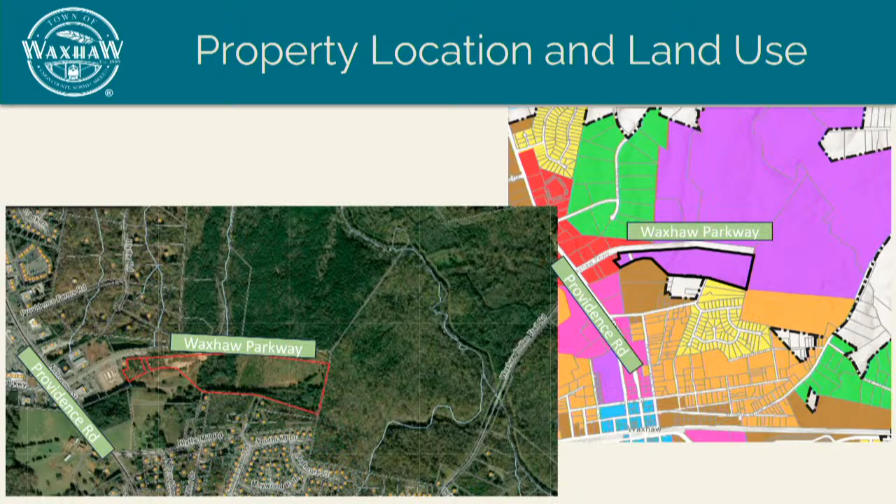The applicant is requesting conditional zoning, which is a site-specific development plan with the ability to place conditions on the plan. The proposed development contains up to 312 multifamily units. Ground floor multifamily is allowed in employment center with conditional zoning approval. The maximum number of dwelling units per the supplemental standards is 24 units per acre.

In addition, the applicant is proposing 54,000 square feet of office retail. The employment center zoning is heavy on industrial and warehousing types of uses, so the applicant is requesting CC commercial corridor uses and NC neighborhood center permitted uses as well.

Setback for employment center includes a 40-foot front setback. They were able to get that 40 feet along the multifamily section. However, they're asking for a 20-foot setback due to the shape of the lot on the west side. The site plan development standards and related graphics make up the proposed zoning district, and only minor alterations may be made in accordance with the LDC.

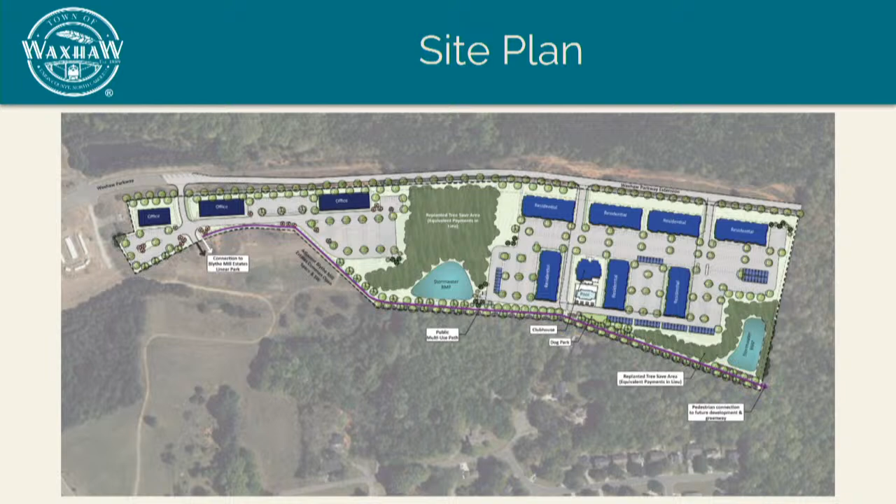Waxhaw's traffic consultant, Kimley Horn, has prepared a traffic impact analysis, or TIA, to determine required transportation improvements within the study area. Based on the analysis performed, the applicant is required to construct half the length of Waxhaw Parkway, from Providence Road to Waxhaw Indian Trail Road. They would have to provide a new signal at Waxhaw Parkway and Providence Road, and then a payment in lieu for a portion of the NC 16 at 75 intersection improvements.

If approved, they would be required to meet the design standards of Chapter 6 of the LDC. This is what they have proposed for now for elevations.

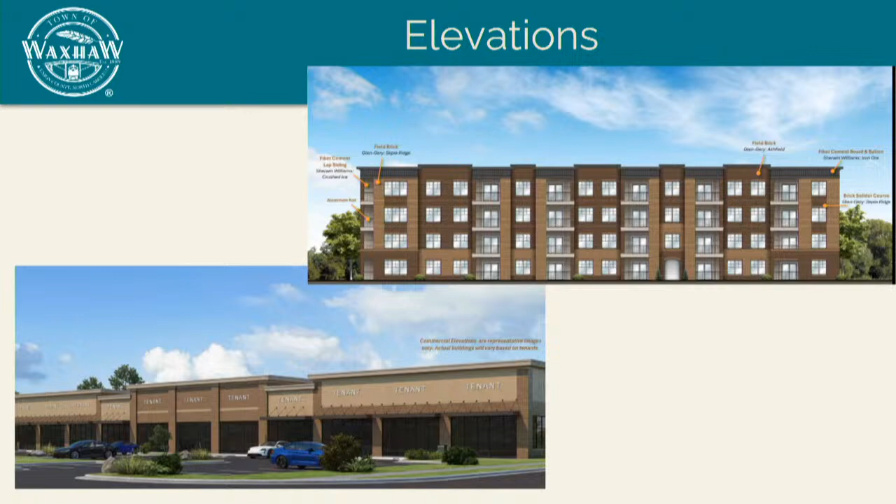The applicant has submitted conditions or development standards for this specific site. Their conditions or development standards are listed, and staff has added additional comments or conditions to their standards in bold. I'll just go over a few of these. Number 1, we already talked about.

EC zoning is heavy on industrial warehousing type of uses. They're asking for NC retail office uses and CC commercial corridor type of uses. Staff is adding that no residential permitted use by right.

Actually it's conditionally zoned, shall be allowed within the commercial retail portion of the plan. Number 2, we're just saying that it shall meet all landscape requirements of the LDC, not just for parking lots. Number 4, trees will be preserved or planted in accordance with the tree preservation requirement.

There's a section in the middle and the southeast side of the plan that may be just brush type of vegetation. We're just reserving the right to go out there with the Union County arborist to make a determination if that should be preserved and mitigated per our fee in lieu.

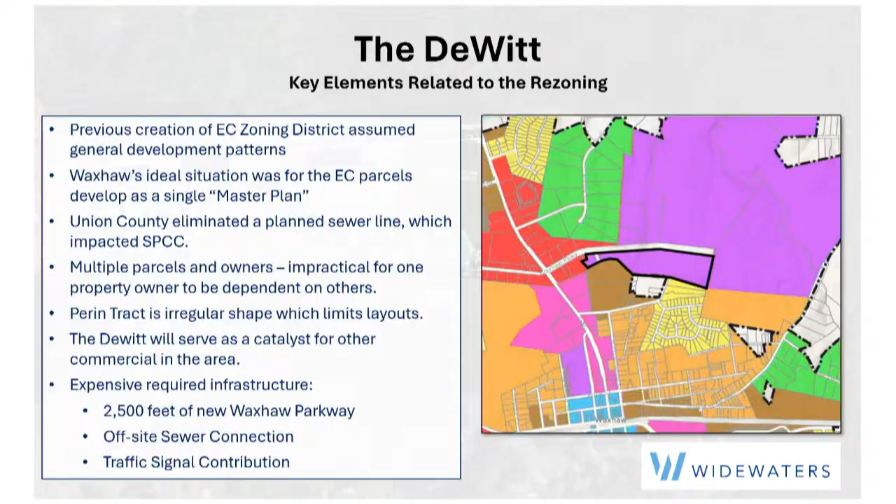So I want to just real briefly and quickly go through a few of the ways this property is going to help continue to be a catalyst for some of the other elements. If you see this property at the top, shaded orange, that will be the new section of the Waxhaw Parkway, and then there will be a connection point to the south.

We're going to talk about one of the other connection points that staff has been discussing with us. You can see that purple area is the Blythe Mill townhomes, which is probably under construction or about to be. The CDs have already been approved and so forth. So that will be part of that connection to the north-south, right there.

So there will be, through that and through this tract, a connection from the parkway all the way down, parallel to Providence Road and NC-16 and Broome Street. What this also does - you can see some of the dash lines are future parkway sections, how that will eventually come around, how Southcliff would connect in eventually. We thought it was important for you to see holistically how this would all be impacted.

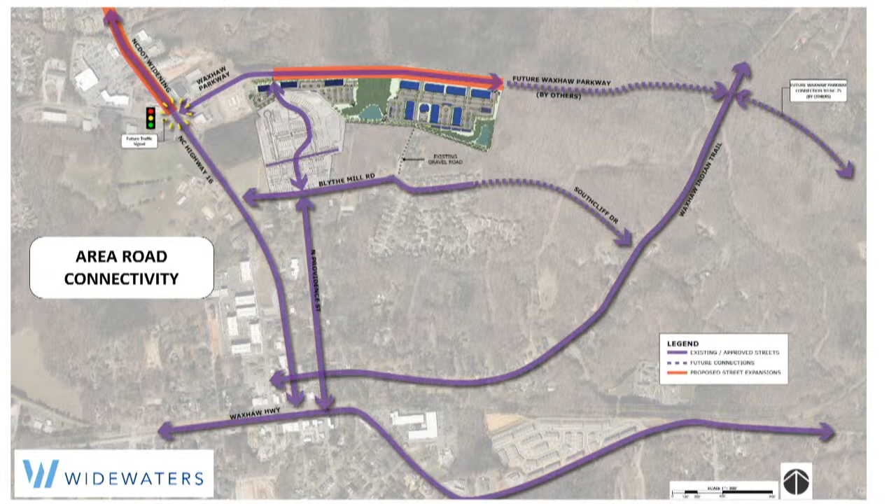Just to talk about the parkway for a second - it's been on the town's transportation plan for 20 plus years probably, and very little of it's been built. So this would get another half mile of a section built, and if each project can continue to build a portion of it, then the town doesn't have to build it, and you don't have to wait for NCDOT, which would probably be decades down the road.

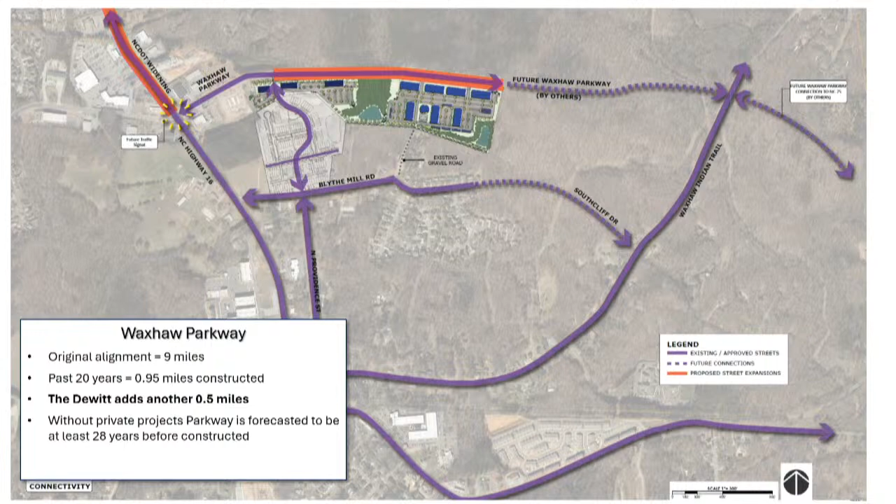Pedestrian corridors, real quick - I wanted to walk through that as well, because as Mr. Chairman you mentioned that connection point and being able to connect people, pedestrians, throughout the entire town. The yellow is an existing, or will be an existing, trail and sidewalk system that will connect the parkway down to the existing sidewalk on Blythe Mill Road, and then that will be able to connect over to basically the Providence Road, Broome Street section right there.

What the applicant is suggesting is a multi-use path on the south side - that dashed green line would run basically the border of the property - and then on the north side you'd have a sidewalk fronting the property, which would go along Waxhaw Parkway. As other developments come along, the darker green would continue connecting going east, and that thicker dash line would be the eventual greenway planned by the town. So no one project can do it all at once, but this is one more step closer, one more step in the process of connecting a lot of different things, not just by road.

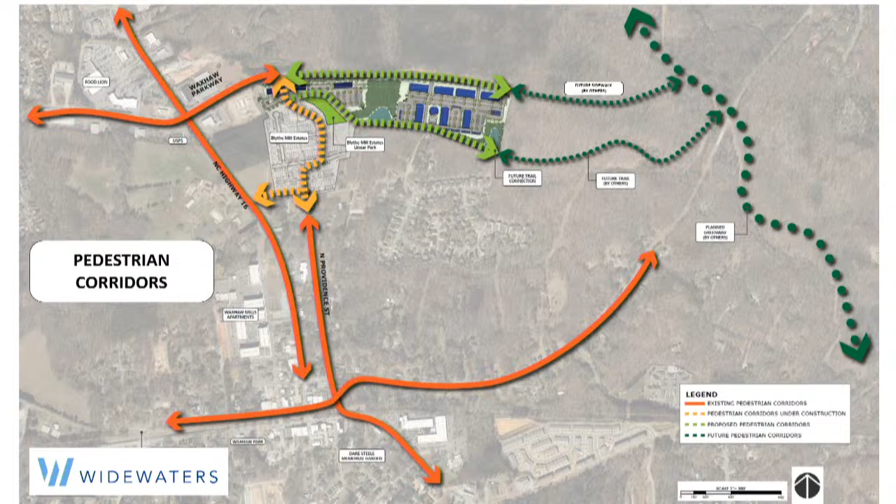Wanted to bring up the one condition that staff had added that the applicant is not willing to accept: this connection point to the south. There is already that connection on the western side that goes north-south.

I'll give you a couple of reasons why the applicant's not willing to do that connection. For one, the neighbors don't want it. At the neighborhood meeting, the neighbors that live in that section specifically came and said we don't want a road connection extending Blythe Mill Road up through your property. They didn't want that cut-through traffic. There are only 3 houses there now, and it looks like on GIS or on a survey, it looks like a real road, but it's not.

It's a paper road. Kind of where that arrow is from the schematic there is that there's a cul-de-sac. Past that cul-de-sac, it's a gravel road that connects 3 driveways, and with the trees in there and the existing situation, it would dramatically change those residents and what we're doing there. So that's a big reason why not to connect it.

There's also some grade issues that will impact the south side of this property. The third reason is we fully understand connectivity and why it's important, and we understand why staff wants it. The difference between this and a typical residential subdivision is we're not connecting a road in the residential section - these are basically apartments, so you'd be dumping a road into a parking lot. There's no real easy way to get through. You could get through, but it's not an easy kind of road like you'd have with public streets on a residential subdivision that need to connect their fronting lots.

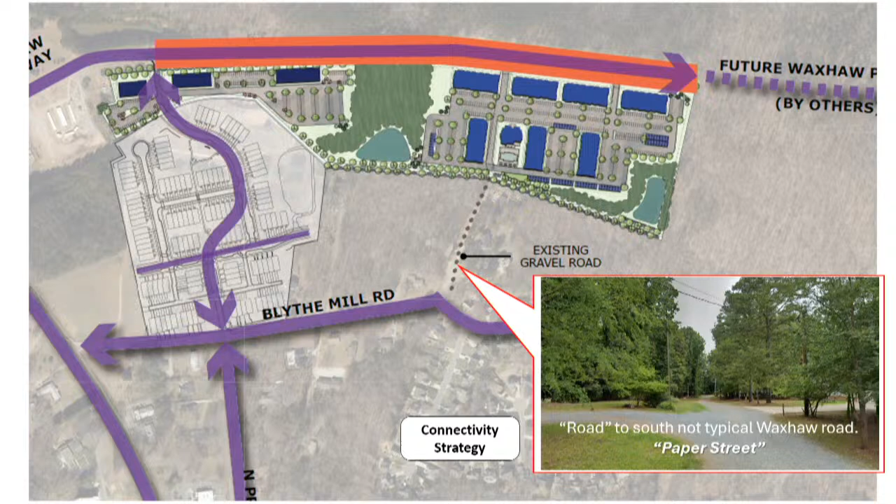This is a different scenario. The applicant's concerned about traffic cutting through an apartment complex - it's just not ideal in a lot of ways, and again, the neighbors don't want it. So that's why I thought it was important to show that, and why that is not something that has been easily agreed to.

Do you have anything to add? I've talked too much. Any questions for us?

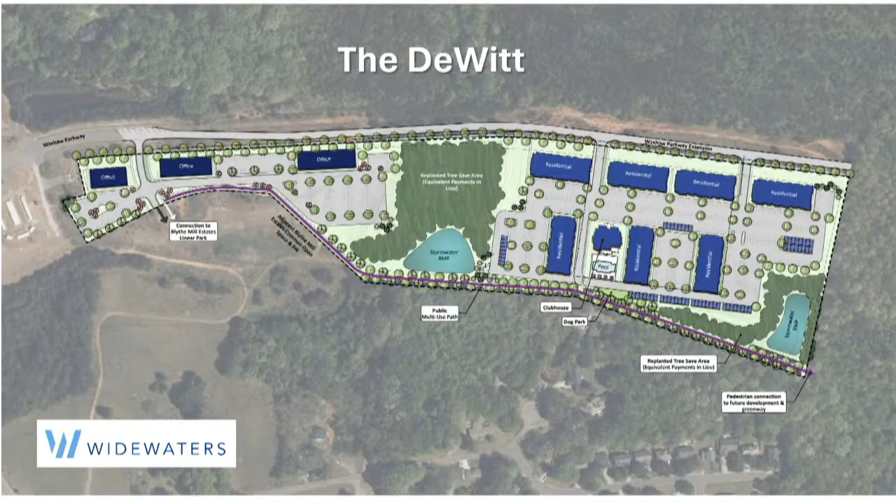I'm also more worried about just balancing it out. That is a large aspect of total call-out on your estimated residential square footage build-out compared to the commercial aspect, and then having the commercial aspect contingent - that part doesn't connect for me. So for me, just that alone, I can't support that.

I will say that the project doesn't work without the residential, because you just won't have the revenues. You've got a large buy-right that is contingent. Would you like the residential contingent versus the commercial contingent? I'm sure if you were going to pick one, you don't want your residential contingent. Why would the town want its commercial contingent?

I'd like to go ahead and still open it up to anybody else if they have any questions.

Can I make one more point? You mentioned that in the employment center, commercial users are to come first. I think the ordinance is actually written kind of vague, and I think they did it intentionally. I think the goal at the time was to not have EC be all residential, and to make sure plans include both uses, otherwise you'd just get a bunch of residential only. That's why this has both on both sides. The developer's not proposing to have residential on the entire site.

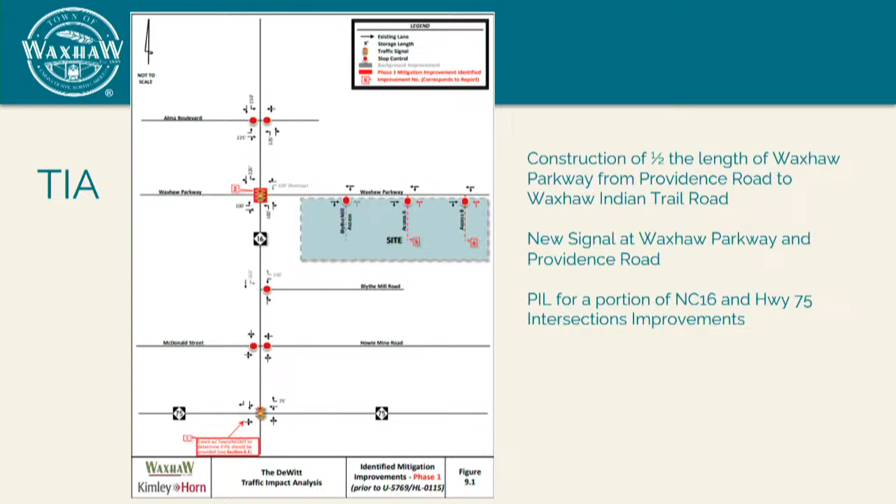Where does that land come from? That can be a request from the town or NCDOT. You'd have to bring it in from the setback, take that area and carve out a paved right turn lane. It's a 110-foot right-of-way, so there's plenty of room for turn lanes if you condition the plan on having them now. So the road would start more to the center of where a 4-lane would be, and you move closer, still preserving the necessary setbacks from the property. Is that what you're saying?

They could put the turn lanes within the existing right-of-way. In a hypothetical world, you would lay out the 4-lane and then add a right turn lane, overlaying the site to make room for that. Understanding it's a narrow site, it may not be able to do that, but that's something that can certainly be looked at. If our true goal is to have it as an artery, built out as 4 lanes in the future, having that additional right-hand turn lane as an additional stacking lane to make those right-hand turns makes sense. Thank you.

From the off-site standpoint, the 2 main intersections will be 16 and 75, which we know is a problem, and then Waxhaw Parkway and NC16. Start with 16 and 75.

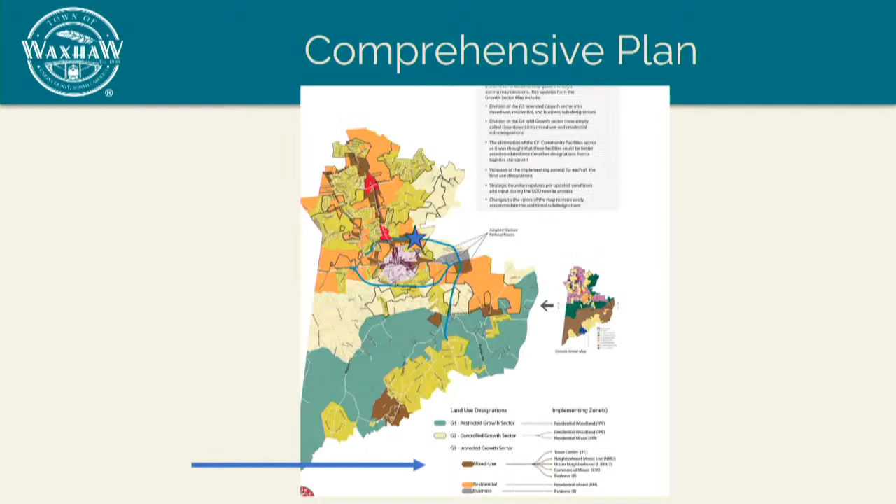I appreciate that. Okay, so we have some conditions from staff that I believe needed to be listed out. And then I guess it would also be in addition to the condition for the proposed right of way, the unknown right of way access, and the current structure of our ordinance for the EC corridor, where commercial was intended to be a center point of the development of the conditional uses.

Where are you trying to go with this? Well, I'm just trying to see if I need to add the additional right of way information into the conditions. You would, or you'd have staff review the right of way before we move to the next step, to review if there's sufficient right of way for decel lanes for the proposed project. Okay, yeah, perfect. So to add, there would be an amendment with John's recommendation for the decel lanes, ensuring we have enough right of way access for those off of Waxhaw Parkway.

Would that be impacted if we made an unfavorable recommendation? List all this? Yeah, Charlie, if they're going to vote unfavorable, do they have to go through all these, or just list a few reasons and note it? Okay, we'll note staff recommendations and conditions, and then we'll make our recommendations.

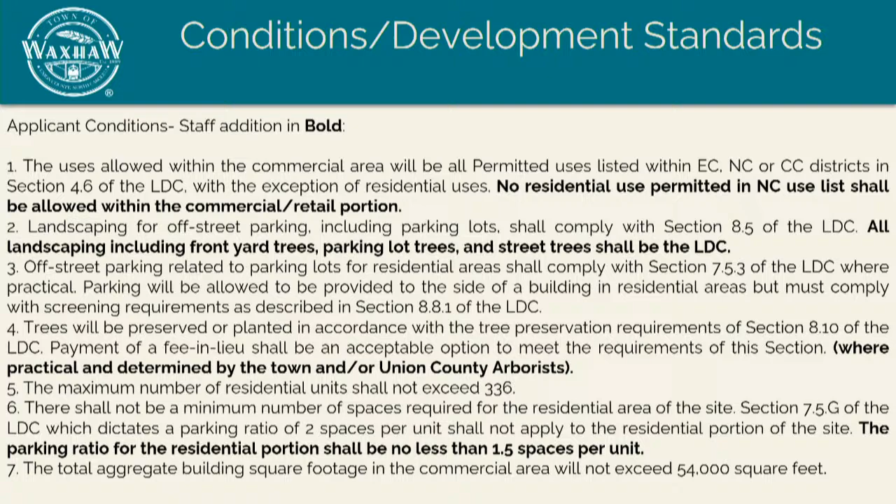Okay, then can we jump back to a motion here for an unfavorable recommendation for CD 004-2024 to the Board of Commissioners.

Just a curiosity, instead of being unfavorable, the question you raised about the contingency—if we took a condition and that contingency's gone, I guess I didn't understand exactly what's unfavorable about it. For me, I was going to amend the 1.5 spaces to 1.6, since that sounds reasonable. And the question is your contingency on the commercial side. I'm just trying to understand what's unfavorable about it, since we could fix that by changing the conditions.

So personally, similar to what Daniel mentioned earlier, I don't think it's consistent with the plan. An employment center may have residential, or could have residential, which is almost like an option. I feel like we're inverse here, in that we have residential that happens to have some commercial associated with it. I'm just reading: employment center zoning allows for development of larger scale businesses to provide employment and economic opportunities. 54,000 square feet is not larger. No.

I'd like to make a motion for an unfavorable recommendation to the Board of Commissioners.

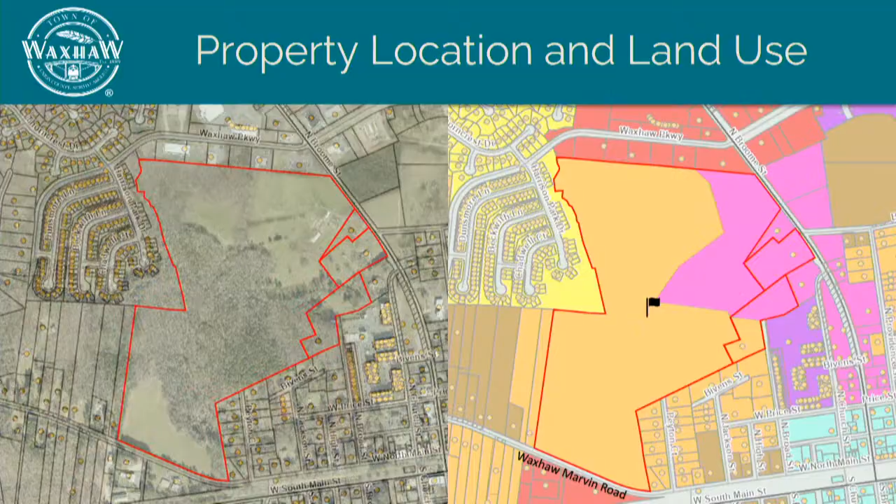This proposed zoning will allow for multifamily, townhomes, single-family, and commercial uses as part of the mixed-use development plan. The site plan, development standards, and the attached vision book and graphics make up this proposed zoning district. Only minor alterations may be made in accordance with our Land Development Code, Chapter 3.

The proposed density for the R4 portion, from this connector south, and the multifamily and commercial is TC. The proposed density for the R4 portion is about 4.27 units per acre, with overall density for the site coming in at 6.79 units per acre. R4 zoning allows for 4 units per acre with a clustering provision allowing up to 5. The single-family and townhome setbacks all meet the minimum lot width and depth using this cluster provision.

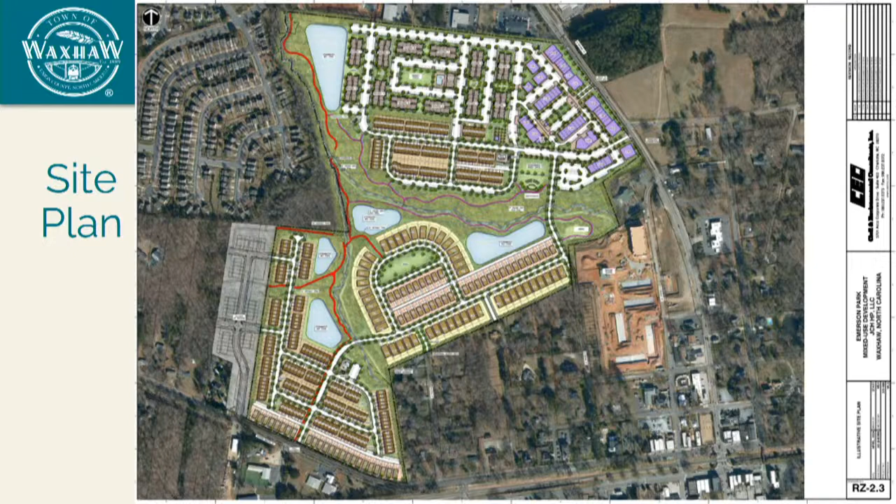Our traffic consultant, Kimley Horn, with Brady Finkley, is here, and they have provided a transportation impact analysis to determine the required transportation improvements within this study area. Data was collected to ensure the traffic created from this project will be sufficiently mitigated, and based on the analysis, they are required to mitigate up to 19 intersections identified in the attached report. Brady will give a presentation on those mitigations more specifically after my presentation.

The Land Development Code requires squares, parks, and other forms of common open space intended to shape the design and character of a project. The applicant is required to provide 15.71 acres of open space, and they currently show 26.14 acres, which meets the 20% open space requirement for the R4 cluster, and then the 2% open space requirement for the town center portion.

Accessible recreation spaces may take the form of trails, parks, plazas, playgrounds, and community gardens. The applicant is building 0.6 miles of Sunny's Way, the primary spine here, as part of the town's 2023 pedestrian plan. This will be a future 10-foot greenway dedicated to the town for maintenance as part of our public trail network. They're also connecting two villages to the Waxhaw trail system via a 10-foot paved greenway, and doing 5-foot crush and run trails throughout the site, which will be maintained by the HOA.

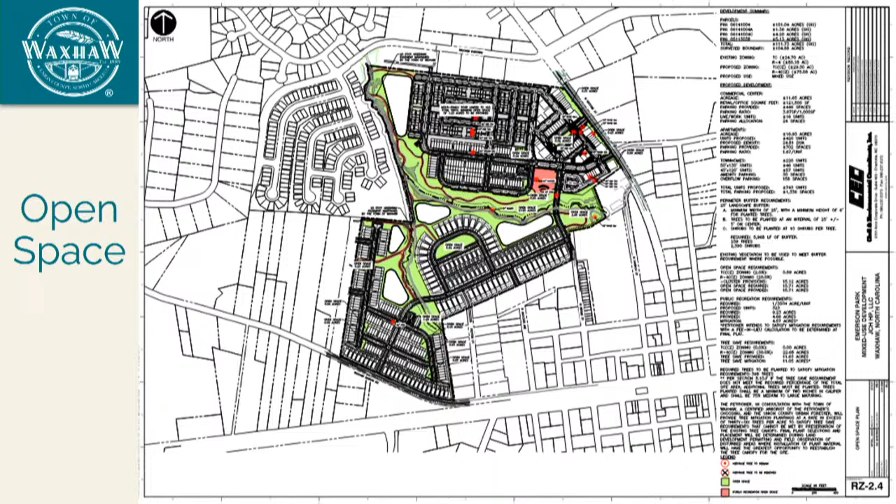Public recreational requirements, 1/35 of an acre. Proposed units showing on the count, for which this is part of essentially how we're going to be able to support our park systems, either expanding needed resources and services, or the green space needed, which I believe we're still technically close to a deficit in our green space allocation for our town. Sure. So my question is, I see the proposed units of 323, and I know there was a question regarding this allocation. Did I miss somewhere in the application the additional 420 units for essentially the mixed residential in the TC area? Was that not in the packet for that one?

By our ordinance, the park fee in lieu is specific to projects that go through a major subdivision process, meaning lots that are divided up and then subdivided along public street frontage. Since the multifamily portion in the TC is not part of a major subdivision, that acreage or units is not accounted for in the park fee in lieu.

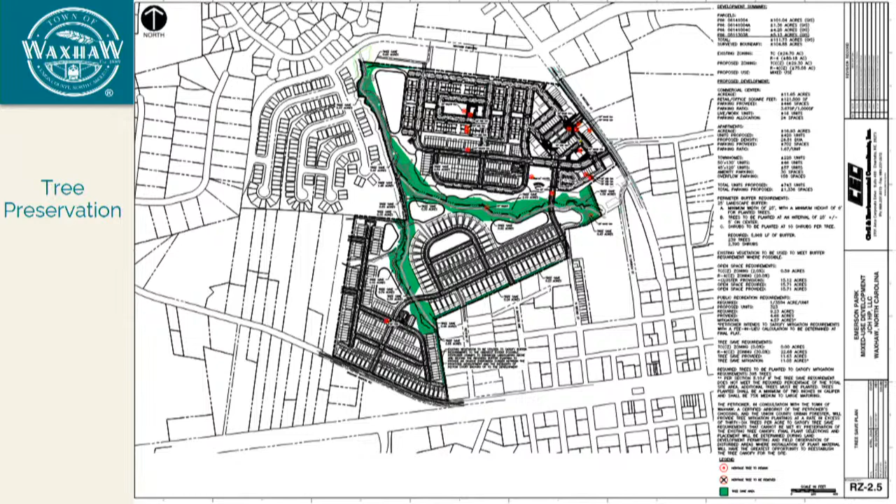I'm going to jump in here real fast for something I noticed when going through the plat that I wanted to point out. With our tree save ordinance for our zoning, it's 22.6... 22.23 acres, we're at 11 and change. Going through the provided documents, I counted myself, and we're going to lose 22 heritage trees, I believe, on the site plan. I get it, there's always circumstances around the health of a tree, but to lose some of those heritage trees within our area, within a key area of our downtown, that's never always a good thing.

Yeah, we had started working with the applicant early on in the phase to get the site ready to take to BOC 2x2s, and after the fact we found where all the heritage trees were, which we had already worked so hard on in the forefront. But yeah, there are several heritage trees throughout the site, and I believe they're preserving 2 of those, one on the eastern side and one central to the site.

So this is part of their vision book, and the applicant will go into greater detail with these elevations as well, but this is what they will be tied to as far as the vision for the single family detached and then the townhomes.

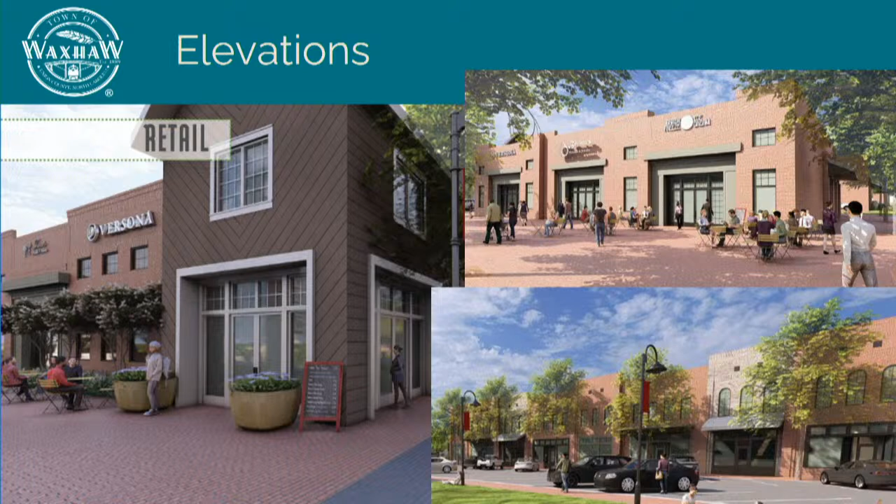And then I provided just 3 snippets of their retail elevations. Again, they will have more in their presentation, and more in the vision book, which they will cover.

Similar to the DeWitt, which you heard before, they had submitted prior to our adoption of the Waxhaw 2040 comprehensive plan. So this submittal is based off of our 2016 comp plan and our 2021 land use map. State law mandates that zoning be undertaken in accordance with a comprehensive plan, and that a consistency statement be prepared and approved for every zoning amendment, which is provided on a later slide.

The 2016 comprehensive plan shows these properties as G3 intended growth sector, a designation intended to be applied to areas that have ready access to transportation and utility infrastructure that can support a large-scale and more intense urban design pattern. Within that subsection, it classifies this as mixed use and then residential.

This designation for mixed use provides for a mixture of commercial and residential uses in areas located along major transportation routes. The allowed uses include apartments, townhomes, duplexes, and light industrial uses, which may be allowed in strategic areas provided uses are conducted entirely indoors and external impacts are minimized.

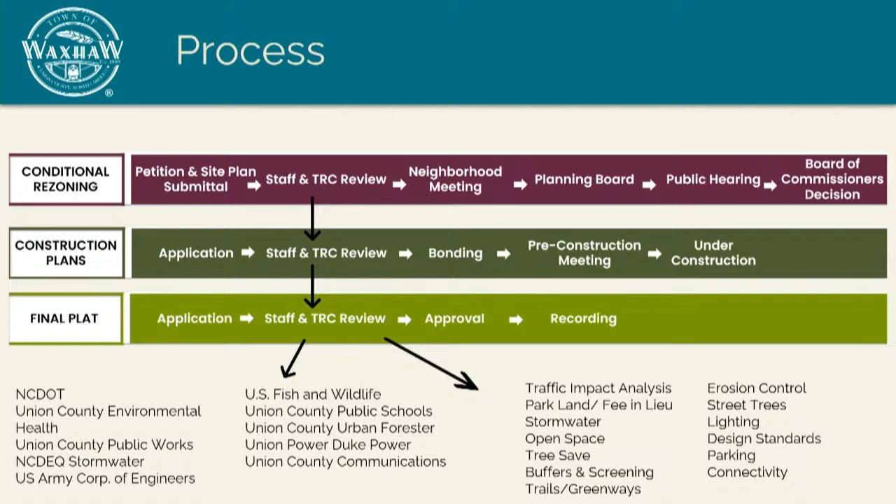Back it up one more slide, just leave it there for a minute.

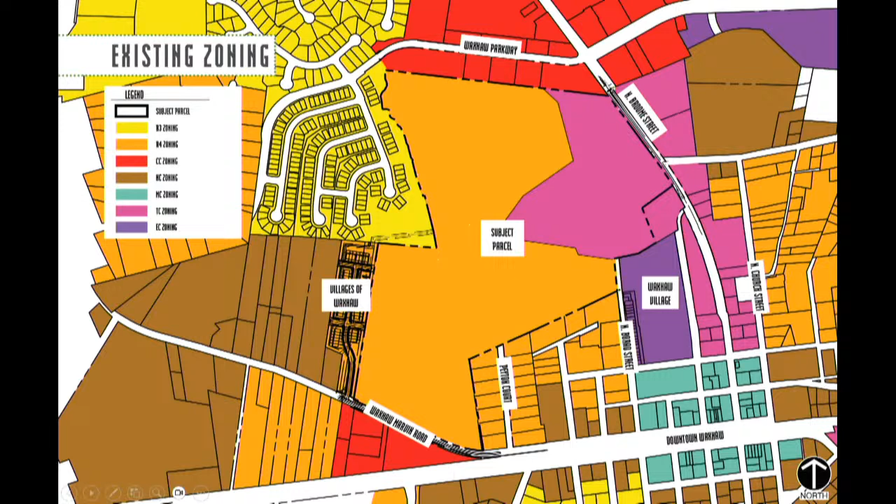Thanks again. A lot of these images are ones you've seen previously, but we took a lot of what came out of our meeting in January, the feedback from your board and from working with staff, to make some changes to the site plan, trying to make sure we heard what you were requesting. So this is the exhibit of the existing zoning we were just discussing, and switching over to the proposed zoning. You can see outlined in gray where that delineation has changed. We're folding one portion of it over to the west in order to fit the site plan we've created.

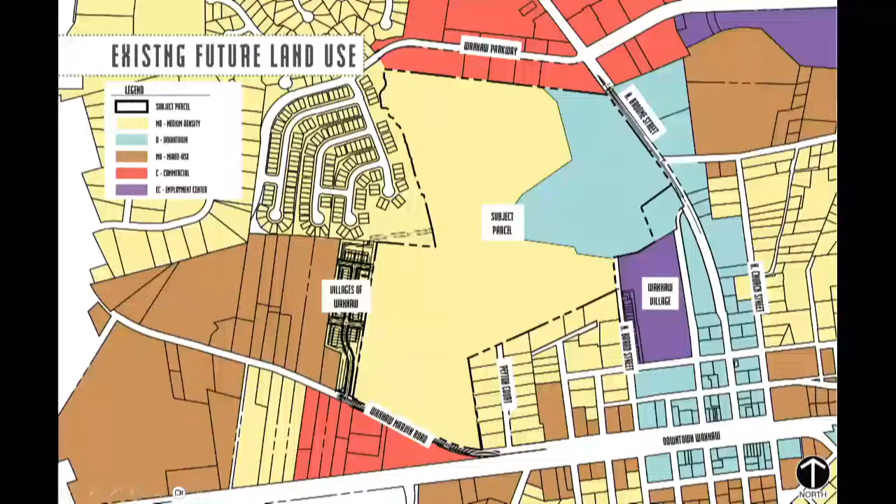Looking at the future land use plan, we're making the same change there. It's a little bit different in terms of acreage, but it's nominally close, so we don't think it's a large request, which is why we're making the request.

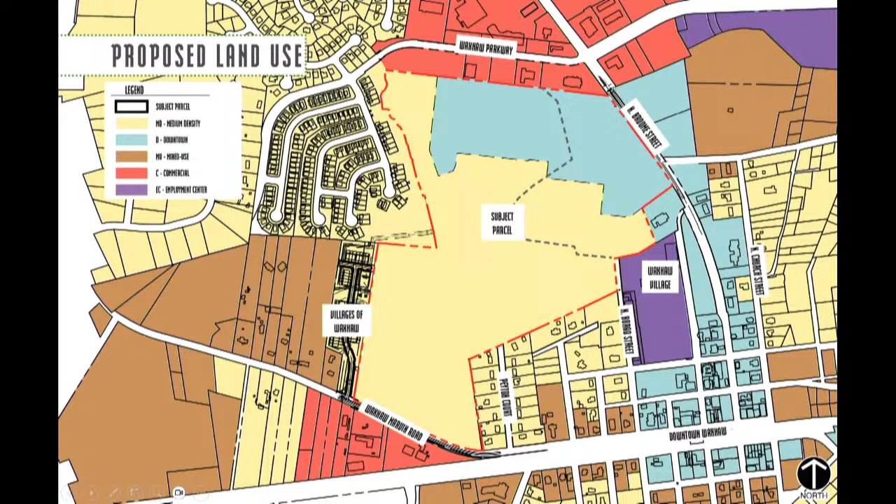Really the request is to allow the ground floor multifamily that's going to support the commercial as part of this project. So when we start looking at our overall site plan and coming out of that meeting, one was the request for the park site and having a park site somewhere into this project. And does this have a pointer on it? Oh, okay. Originally we had—another thing that came out of that was questions and concerns about parking, as well as the unit count for the multifamily.

So we started looking at how can we activate this town center area with something that unifies the community. We lost a couple of townhomes, we took out a couple of commercial buildings, we added some overflow parking here, and we created a flat green space that can really become a programmable space central to both the multifamily, the commercial center, and the townhomes. Then using the natural topography, this area really just lends itself well for some sort of outdoor gathering amphitheater that we could place within this space.

We also looked at the unit count. It was brought up that the unit count was a point of concern. Since that time, we've taken out this building here and converted that to townhomes. And then in our conversations with multiple different builders, we feel like the unit count, which was originally at 504 when we came before you in January, dropped to 468. We've since dropped that plan down to 420.

Now, this plan still parks at 1.5 spaces per unit at 468. Knowing that the buildings are going to change, but we're going to pick up almost 100 spaces in parking, we're going to be closer to the 1.7 to 1.75. Similar to the previous applicant, we make that request based on our experience with working with multifamily builders in Charlotte, where 1.7 starts to get to the upper echelon of where we feel that parking threshold should be. After that, we start getting into a lot of excess impervious space, and with space being a premium in this project, that's why we're making this decision.

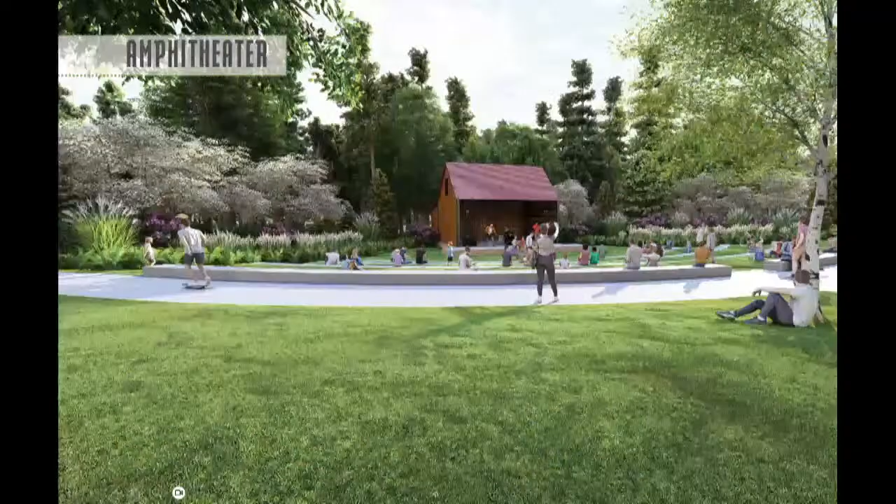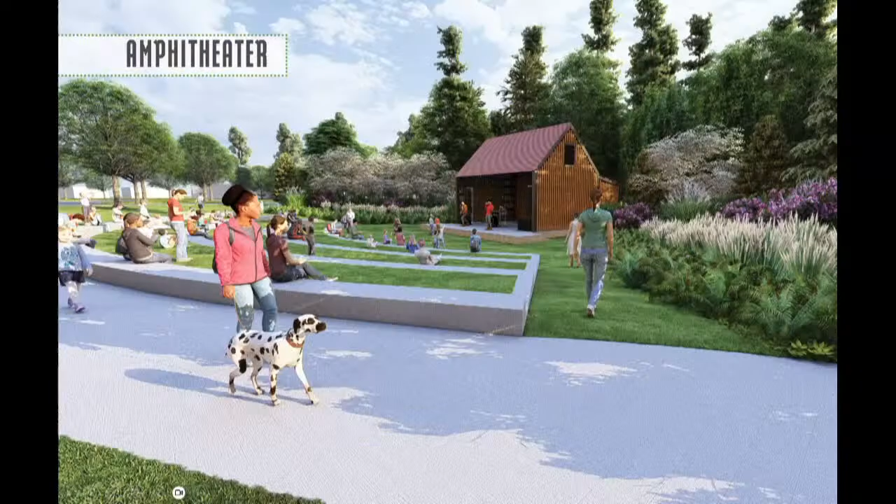So we've got some subsequent slides here that really start to show what this park space could be. We want to keep—previously we had presented the idea of incorporating the urban mill with the farmhouse look in all of our architecture. It's echoed in the vision book that we have, and we start to think about how these spaces could be created. Anything we do in these spaces will be in conjunction with Parks and Rec. They want to be involved. We want them involved. We want the community involved.

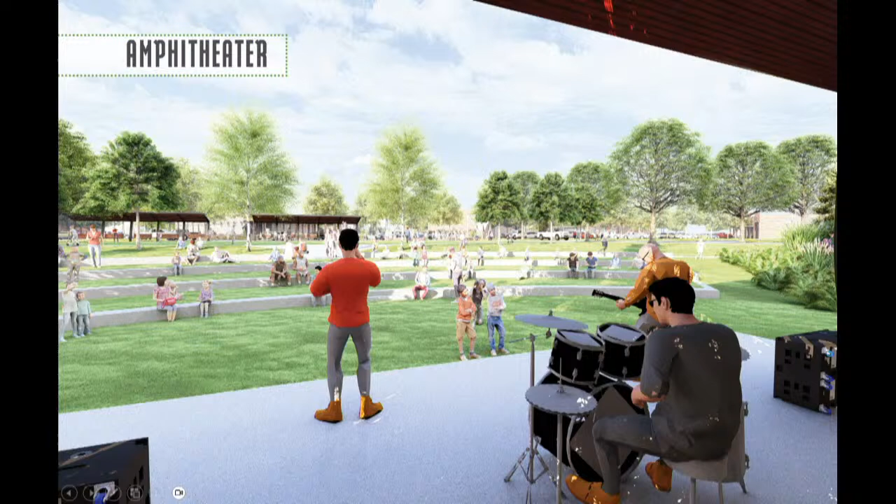This area is about 1.5 to 2 acres, depending on where you draw the line of delineation, but then it feeds out and really opens up this space to any number of activities. It also becomes a central gathering point where a lot of the trails come together. We've got a lot of 10-foot asphalt trails throughout, but we've also added a number of 5-foot crush and run trails. We've had discussions about programming elements along those trails. Parks and Rec doesn't seem too keen on taking over maintenance of that. That doesn't mean they can't be elements included as part of our package, whether we're talking trailheads, exercise stations, or outdoor education stations—I think any options are probably still on the table. But as far as what they would actually maintain, we didn't include them in this package.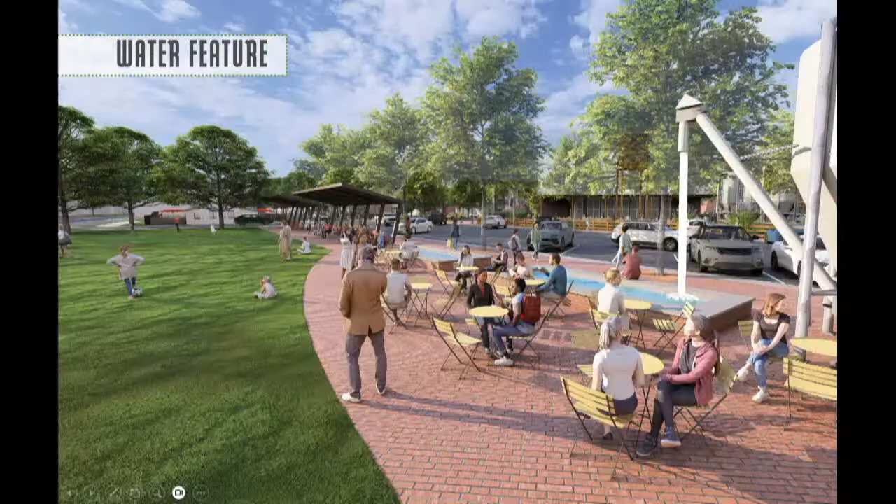Again, the incorporation of outdoor features such as using a grain elevator to become an outdoor fountain. It's just an idea that we came up with. None of this is set in stone, but it sets a precedent for the type of design and character and elements that really give a nod to the history and the nature of this project.

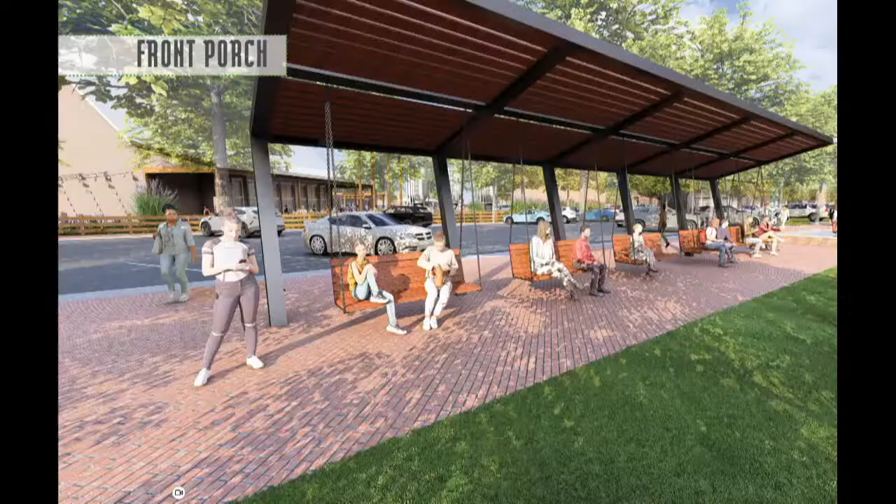Just a couple more images here about what we're proposing. This would be really along the street side near the town center. This is just a shaded structure. Again, these are placeholder elements, but could be incorporated, and by having them included in the vision book, it sets a precedent that gives the town leverage to say we need to incorporate these certain elements as part of this project. We want this to be a great project, and so does everybody else.

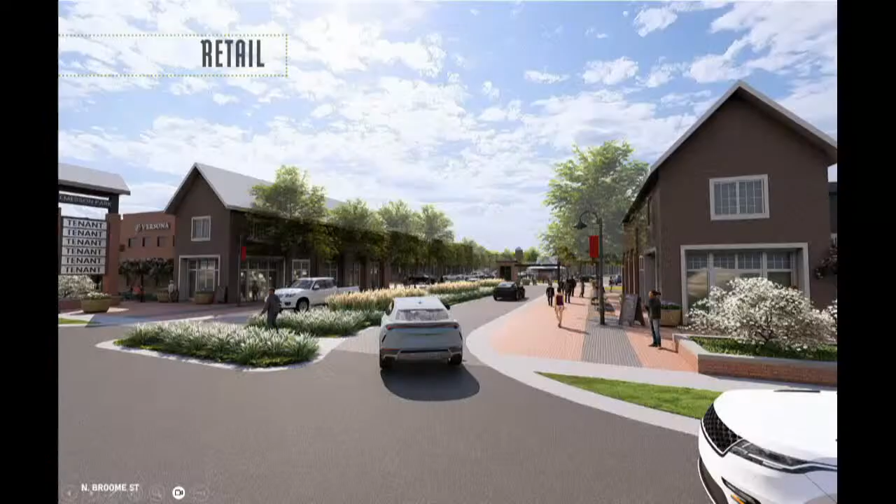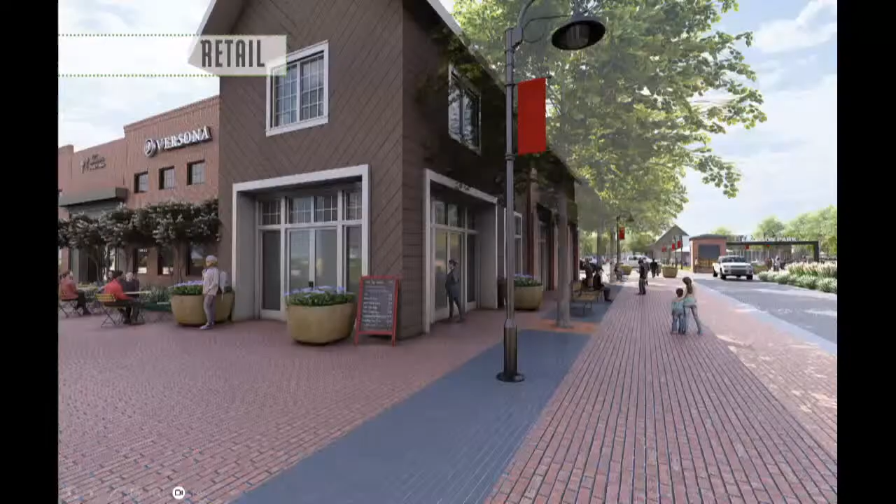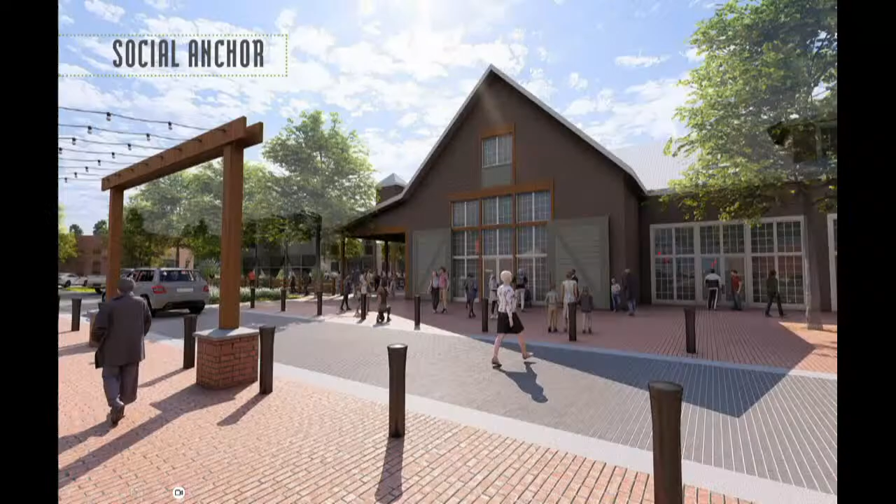And again, we're still keeping all the other elements we talked about, a lot of the outdoor green spaces, common spaces, plaza spaces. We want to create something that's, while the central park would be maintained by Parks and Rec, the association would maintain all these other spaces that could be programmed for various different event spaces. Again, with the architecture, giving a nod to some of the architecture of downtown Waxhaw, the farm elements.

What do we call the Central Park portion of this project? I don't believe the amphitheater area, I guess we could call that. And that's what the city would be maintaining. That's correct.

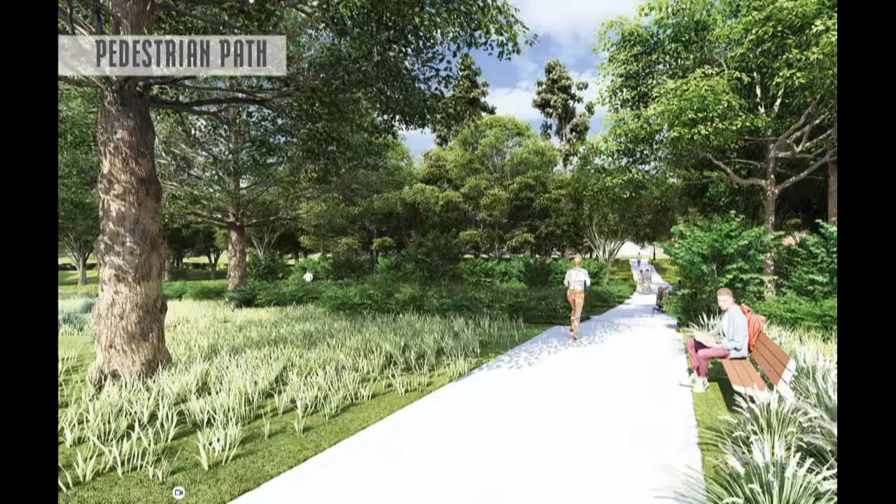Well, Martin stole all my thunder.

I'm Rob Kreischer. I want to introduce you to our Jones team. I'm with Jones Homes, a longtime resident of Union County. Mark Kime, Mason Greason, who are our engineers for the project. Mark's been the senior project manager on the project since the beginning. John Carmichael, just met Aaron tonight so I don't know his last name, with Robinson Bradshaw, the law firm. They are our land use attorneys for this project.

So what I wanted to do was briefly tell you how we got here tonight. For those of you who've been on the phone with me or in a meeting with me, you're going to find it hard to believe that I do something briefly, but I have timed this, and I got it down to 7 minutes.

Roughly a year and a half ago, this property, the Howey family property, was brought to me and I was asked if we were interested in developing it. What I do, just to educate you guys, is when somebody brings me a property, I look at 3 things: the existing zoning, the school system, and sewer and water availability.

Once I know what the existing zoning is, I have our engineers do a by-right site plan for me, so I can make a decision whether we want to move forward. After doing that, we began negotiating with the Howey family, and roughly a year ago we went under contract with them. We had a due diligence period, which we've now passed, and we are not in due diligence anymore. We have begun purchasing the property. So that's just to bring you up to speed.

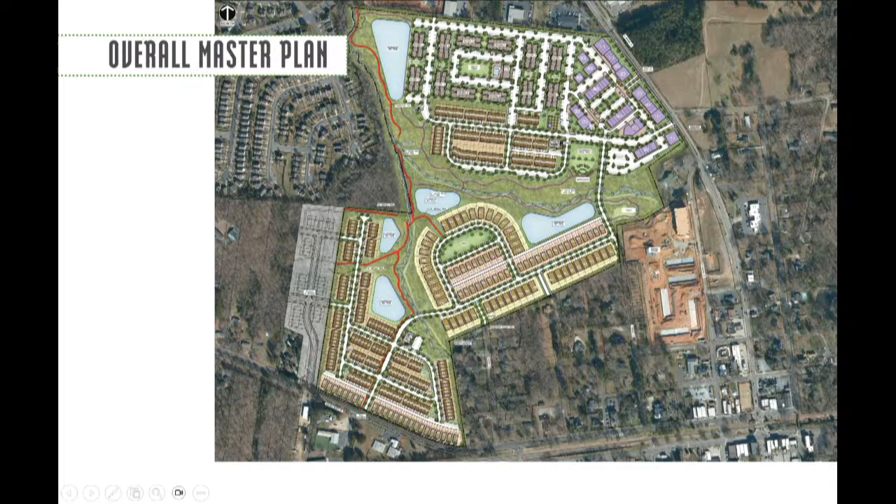Understood. I guess where I'm coming from, our logic, is that we have codes on the books for a reason. What did we say, 1/35 of an acre for park space? Correct, 1/35 an acre. So anything short of that, it's a fee in lieu, right? But there's reasons for having those codes on the books. And like we said, once that land is gone and used up by a resident or even a commercial space, it's never coming back.

I think some of us shared those concerns in other meetings as well, so I just want to make sure I got that out there again. Awesome, thank you John. Ted.

Again, I'm waiting for the traffic study because I think that's going to be the critical one. That's what, because we're putting all the challenges with... I know. To me, that's more important than the green spaces. Where are these cars going to go?

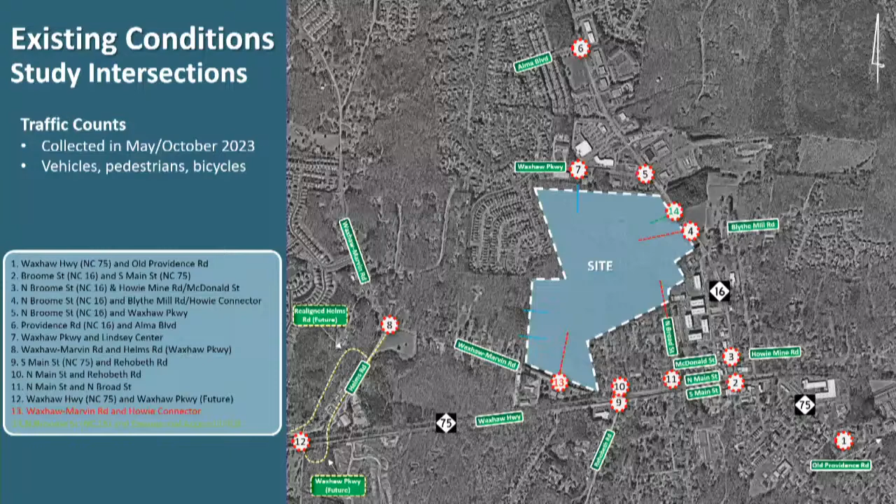So if you look east, it goes over to Old Providence and Waxhaw Highway, carries over to the west to where the future Waxhaw Parkway / Helms Road is currently being constructed to bridge over Waxhaw Highway and connect into Waxhaw Highway, and then up to the north to Alma Boulevard.

Okay, then we jump into background conditions. When we look at projecting growth independent of the proposed site, we look at two buckets. One is non-specific growth, which is regional growth based off of the annual growth rate, independent of the specific growth we'll talk about in the second bullet. We chose 1.5% per year based off of past traffic patterns, as well as consideration for the second bucket.

The second bucket is specific approved developments that I'll show on a map in just a second. When you add those together, it came out to about 6 to 7% per year up to 2027, which was phase one. And if you extrapolate that up to 2032, it comes out to about 3 to 4% per year.

Brady, can I stop you there? NCDOT typically looks at 2% per year on their traffic analysis, is that correct? It's case by case. Okay.

So here are the 7 approved developments I just discussed that we included in our analysis. The traffic from these 7 developments was added on top of the existing counts to project future conditions: Cottage Park next to Helms Road, Rone Creek Station south of Waxhaw Highway, the Preserve at Forest Creek down to the south, Rogers Pond and Seven Hills east of Old Providence Road, Old Town Village, and Blythe Townhomes northeast of the downtown area.

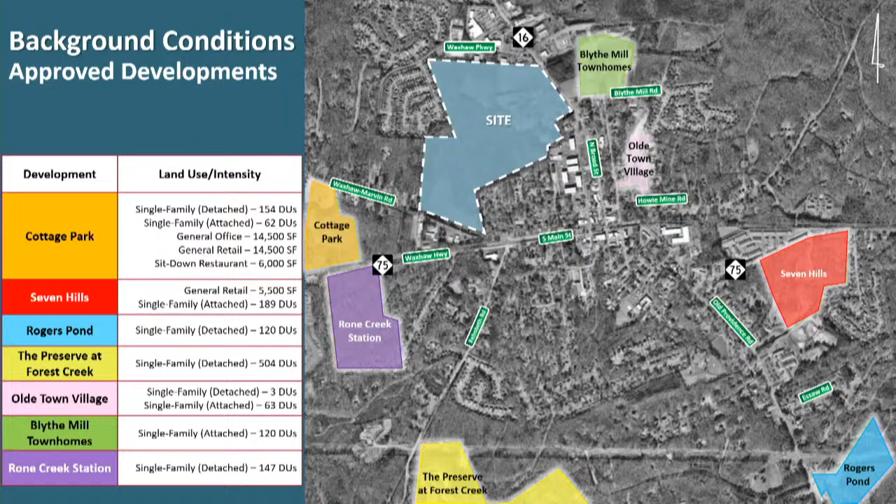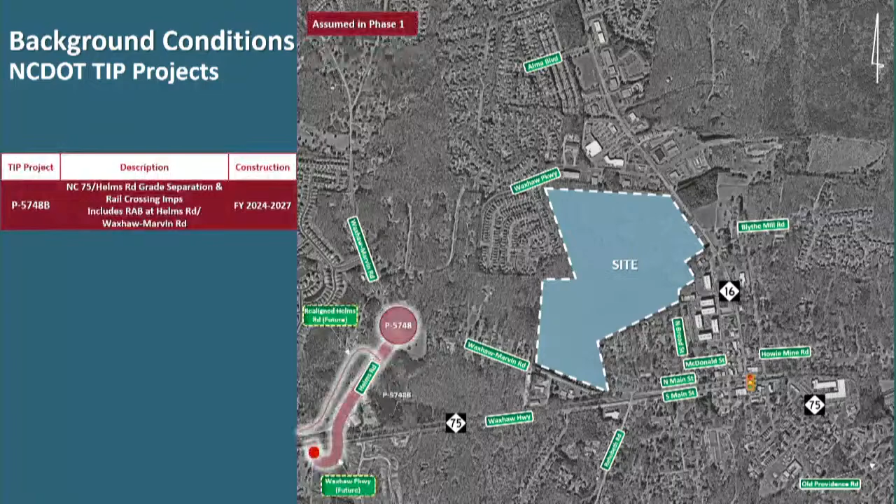We have a number of TIP projects currently funded for construction, which is great in this area. I think 4 total, and 2 were assumed in phase 1: P5748, the NC75 and Helms Road grade separation. They're removing the current at-grade crossing of Helms Road, bridging over NC75, and providing an intersection at NC75, and as part of that, there would be a roundabout constructed at existing Helms Road and Waxhaw Marvin Road. That's currently under construction and funded to go through 2027.

Next is down to the southeast, the roundabout at Old Providence and Waxhaw Highway. A couple of other developments also provided payment in lieu to help fund that project, and it's currently funded in the STIP for 2026 to 2028. However, the latest I've heard is that NCDOT is going to try to construct it by ripping the Band-Aid off, meaning as quickly as possible, closing down and trying to get it done during a summer, either 2026 or 2027, so sooner than 2028, although the funding goes through 2028. Because of that, we assumed it was in phase 1.

In phase 2, we have HL 0115, which was recently added to the STIP and has since been accelerated a year, which is great. That project widens Broome Street from 75 up to North Church Street to a 3-lane section, as well as adding an eastbound left turn lane from Waxhaw Highway onto Broome Street, which we've seen is much needed and will provide quite a bit of additional capacity. That one's currently funded for fiscal year 2028, so we included it in phase 2.

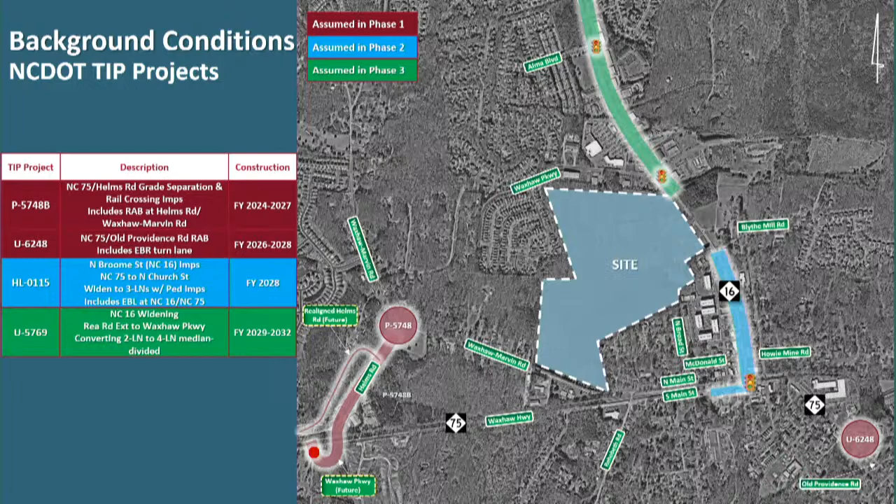And finally, U5769. In phase 3, that's the NC-16 widening from Rea Road Extension down to Waxhaw Parkway. It overlaps with this project in a sense because the commercial driveway, the right-in right-out, is right midway through here. If you envision U5769 being widened from 2 to 4 lanes, the second southbound through lane would come through Waxhaw Parkway and then taper down from 2 lanes to 1 right at that driveway. One of our recommendations is to continue that second southbound through lane all the way down and drop it at what we'd recommend as a signal at Blythe Mill and the Howie connector.

Okay, so now we'll talk about the actual site traffic. In the first phase, we have what we call the Howie connector. Again, this is a slightly different site plan, but the site access points are the same - that's the Howie connector here at Blythe Mill. Blythe Mill Road is proposed to be realigned in line directly across from the Howie connector, and that's proposed to be signalized. Number 2 is down at Waxhaw Marvin Road, which per NCDOT is recommended to align with the Town Parks and Rec Center. Number 3 is the North Broad Street extension, providing direct access into downtown so residential can reach the downtown commercial without getting out onto external roads, which is good. And then we talked about a ped-only connection, as Mark or Rob mentioned earlier, to Peyton Court.

Phase 2, we have basically a cross connection into Lindsey Center along Waxhaw Parkway, giving some of this multifamily direct access to Waxhaw Parkway. We also have a couple of cross connections into the Villages of Waxhaw. And then finally, phase 3 is when this commercial comes online and we have a right-in right-out access to NC-16.

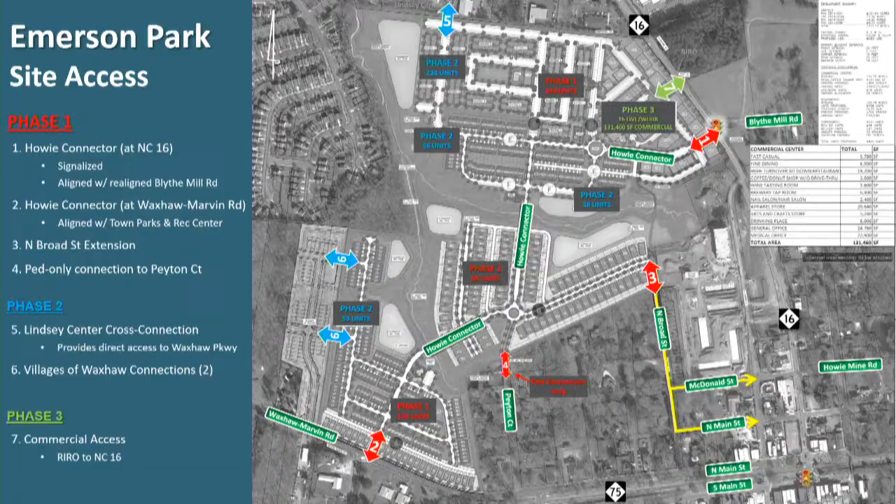Once you add commercial into a residential, more mixed-use development, that's when you get some internal capture, which is great - trips that would be generated to a commercial site on its own are internally captured by the folks living there. So they don't have to actually get out to the external streets. There's going to be some attraction between those mixtures of uses, which from a planning and traffic perspective is a benefit, as well as pass-by. When you have commercial development, pass-by is traffic already along those roads that's not newly generated to the network because the site's there - they're already there, pulling into that commercial site and getting back on their road or on their way home.

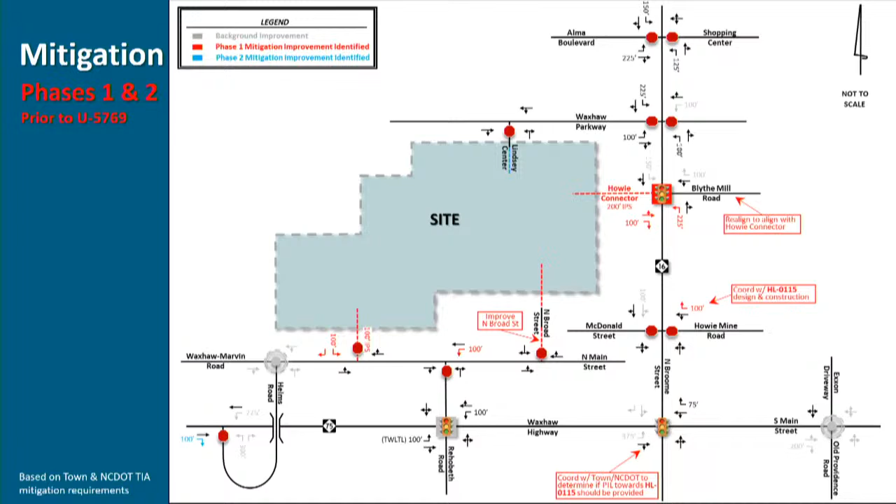I want to jump over to the Rehoboth Road intersection and Waxhaw Highway. I know there are some future road improvements already planned for that to be a signalized area, but I was surprised that there was no mitigation in that area for this project, given its size and location, knowing that we have to either go up and through the commercial piece or the residential. That's going to be a lot more traffic on Waxhaw Marvin, possibly impacting those two crossing points where they go at grade over the railroad tracks.

Sure, great question. So three things come to mind. One is that the Preserve at Forest Creek is already planned and required to put a signal in there, so we assume that intersection is already signalized by that development. We also have an improvement in Phase 3 that we're recommending at that intersection, a northbound right turn lane.

The third thing is that this piece, P5748, provides quite a bit of benefit to this constrained and challenging area, because once you have that direct connection using Helms Road or future Waxhaw Parkway to bridge over NC 75 and not cross the railroad tracks, tying directly into Waxhaw Highway, I think it would take quite a bit of traffic that's currently choosing one of these two options, neither of which is ideal, and pull more traffic onto that Waxhaw Parkway.

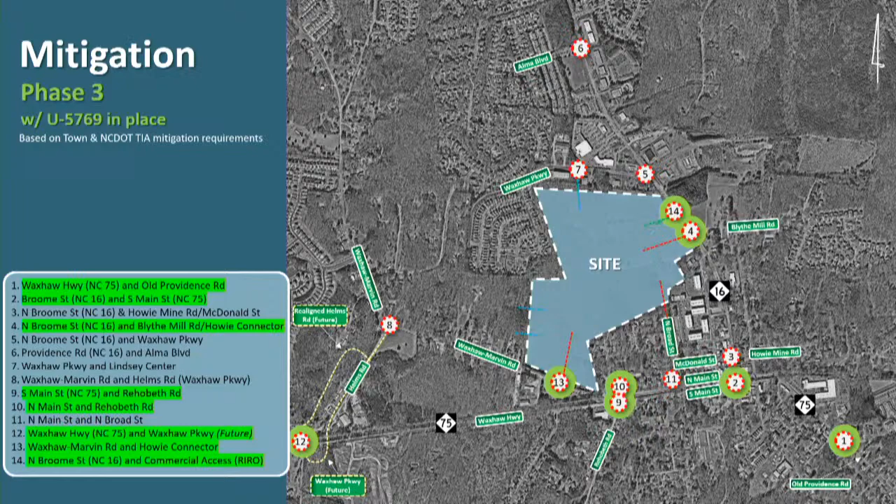These highlighted in green are the intersections we've identified mitigation for. We'll start down on the south side. This roundabout that's planned, U6248, with the added traffic, really pushes it beyond the volume-to-capacity threshold you like to see with a roundabout, so we identified mitigation for that—a northbound right turn lane—and ideally coordinate with that TIP project to incorporate it.

This will be the big one, NC 16 and 75. There are pretty significant impacts at this intersection with this site, and there are limited options you can do. One thing that, from a pure traffic standpoint, does a pretty good job—you may have seen this before—is basically...

restriping the southbound approach, which is only 2 lanes. You really can't widen it any further because of a lot of constraints there, to a left and a left-through-right. So you'd have dual lefts coming south, really facilitating that heavy movement going through downtown.

This part is actually not the big deal. The big impact is the second receiving lane needed for the dual lefts, where you have on-street parking, historic buildings, and a sidewalk at a different elevation. Then you've got CSX on the other side. Yeah, CSX, yes. There's a lot going on there.

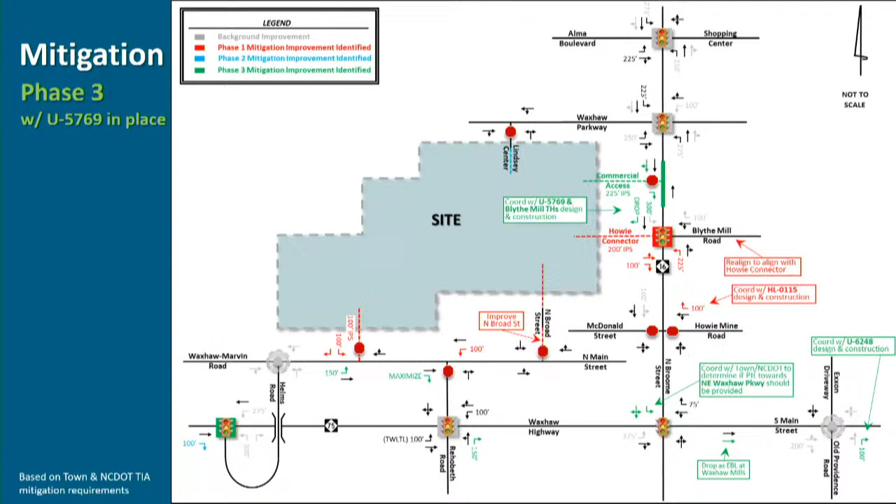Can you roll back one slide to the Rehobeth and North Main Street crossing, and maximize the right-hand turn. I know that area has some problems as well. I think there's some irrigation or a big drain right there with some railing.

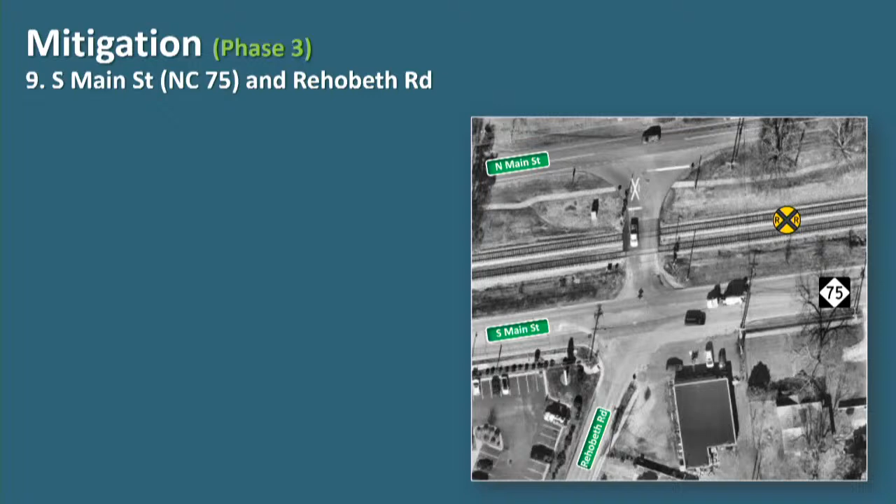My ask was essentially how much stacking did you estimate would need to be mitigated. I was trying to pull up that picture. You have some utility issues right there that impact your ability to provide as much storage as you would like. Ideally from a traffic standpoint, correct me if I'm wrong, but I believe it was 425 feet.

So that's why we said maximize it, because it would be a challenge to get this. In reality, most of the traffic is turning right, and so if you don't, it's not a safety concern—it's really just about getting out of the way to allow through traffic to flow.

Correct. How can we get those essentially into stacking lanes to allow that double right-hand turn for most people probably heading back out to 75 and 521? Or hopefully in the future using our bypass and overpass over on Helms Road.

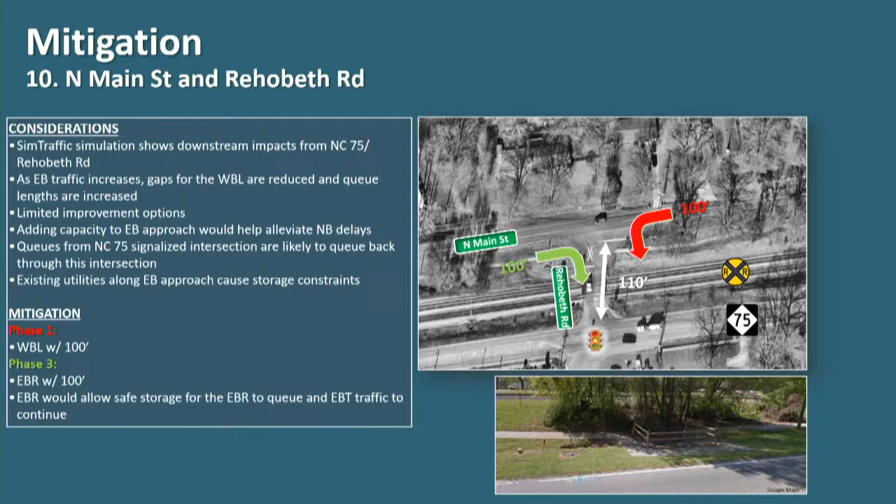100 feet is needed now. What happens when you put all these cars on the road with this project? You have to maximize the heck out of that. That's where the model is showing 425 feet—what it all needs.

425 feet is the model, and because of utility restrictions, we've got 100. So we got to do the best with what we've got.

When a train's there and people still want to continue down Waxhaw Marvin Road, when I drop off my kid, they're out of luck. That's why we're saying maximize, because if you can just get people out of the way, you can allow traffic to still flow. The more you get, the better it is.

Anybody else have any questions on traffic? It was as much as I thought it would be for this project in this area. This area is going to be heavily impacted with a large amount of vehicles looking to travel amongst our town and outside of our town to neighboring municipalities to shop and do other business. Clearly downtown will feel the full force of a density possibly coming into our community.

Is there anything else traffic oriented that you wanted to raise to our attention? No, I have really detailed slides if y'all want to get into it, but I can stop here—I think we're at a good spot for stopping on traffic unless something specific comes up. Thank you so much for your presentation this evening. Thank you for your time. Really thorough, thank you.